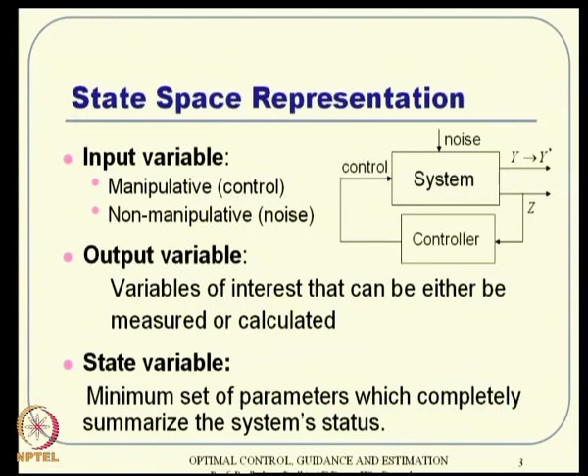So, let us start with state space representation, very basic ideas. When you talk about any dynamical system, we typically talk about 3 types of variables. One is input variable, the other one is output variable, the third one is state variable. I discussed that in the first lecture also, and typically the input variable can be classified into 2 classes. One is manipulative, which is control variable, or it can be non-manipulative, which is noise, and remember both are input to the system anyway.

And then considering output variable, that can be defined as either the variables of interest or some measured variable or calculated variable. So, these two may or may not be same, and this is what the diagram tells. In other words, your performance output can be y, and you want to drive it to some desired value y star, whereas the measurement output can be z, and that may go into the controller, and then control design can take place.

So, it may happen that part of the y variables or all of the y variables can be part of z and vice versa, but they need not be same. All these things can be talked about in a standard state space class. But coming back, the variable of great importance is state variable, and that is defined as the minimum set of parameters which completely summarize the system status. More definitions and implications can be found in a standard textbook on systems theory, and any modern control book will give you more insights with examples.

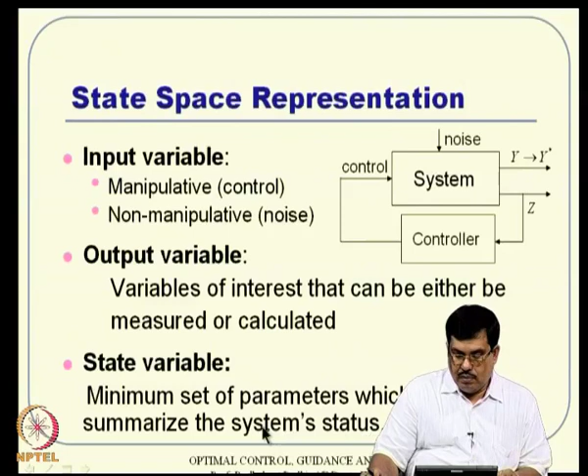But we understand what we mean by state variable, that means a minimum number of variables which can describe the system state. And obviously, remember that you cannot take more than the state variables that are required, or you cannot take less than the state variables that are required either. So, those things are known to us.

Now, continuing further, we have broadly 2 classes of systems that we discuss here: one is nonlinear systems, the other one is linear systems. When you talk about nonlinear systems, we represent the state equations this way: x dot equal to f of x, u. Typically, time variable t is not there, where x dot represents derivative with respect to time.

And remember, the dimension of state is Rn, that means n number of states are there. Control belongs to Rm, that means u is m dimensional, and the output of interest can be p dimensional. And this letter R represents real numbers. So, we typically deal with all real numbers here.

Nonlinear systems, as we know, are typically a little bit difficult to handle, analyze and synthesize. So, most of the time we linearize the system about some operating point, and then end up with representations like x dot equal to Ax plus Bu, y equal to Cx plus Du. But remember, this x in the nonlinear system and this x in the linear system are different meaning-wise.

When you talk about state of nonlinear system, it is actually the true state, whereas most of the linear systems are anyway linearized, so the linearized state and control are typically deviation variables. That means x represents delta x and u represents delta u implicitly here, and delta x can be the deviation of the state from its operating point, and delta u the deviation of control from its operating control. So, those kinds of definitions are available.

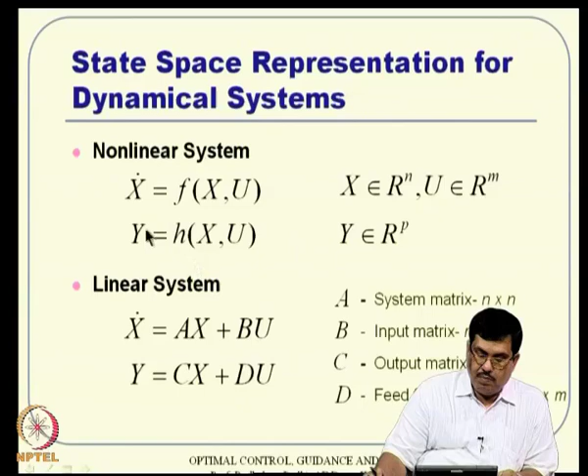So, in this particular course, we will deal both with linear systems as well as nonlinear systems. We are not talking about only one class of things, we will deal with both of them together.

And coming to the state variable selection, typically the number of state variables, that is the order of the system, is equal to the number of independent energy storage elements. Okay, but there are exceptions as well; you can see a couple of examples in some standard textbooks like Norman Nise that will give you that.

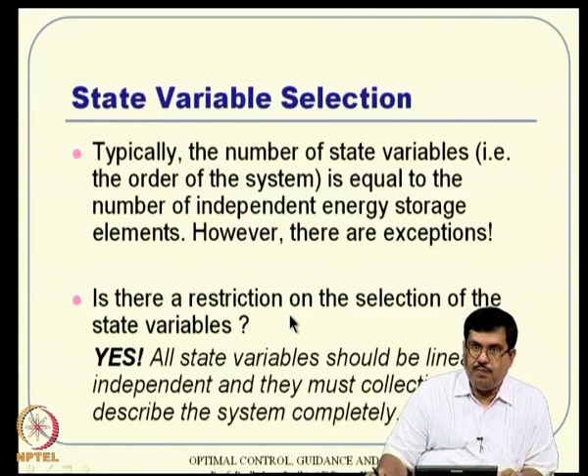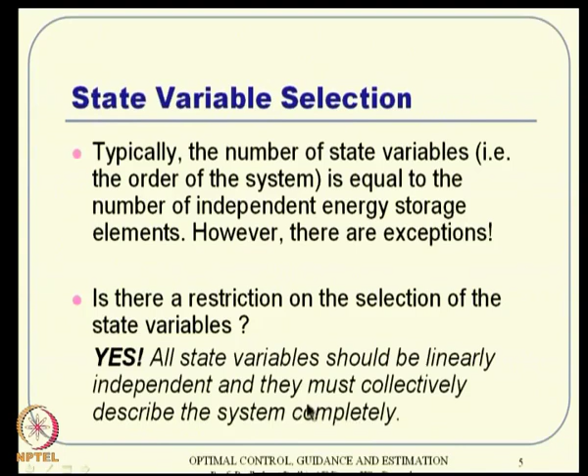But is there any restriction on the selection of the state variables? The answer is yes, and the very primary requirement is all the state variables should be linearly independent, and then all of them must collectively describe the system completely. These are the two things that the state variables should have.

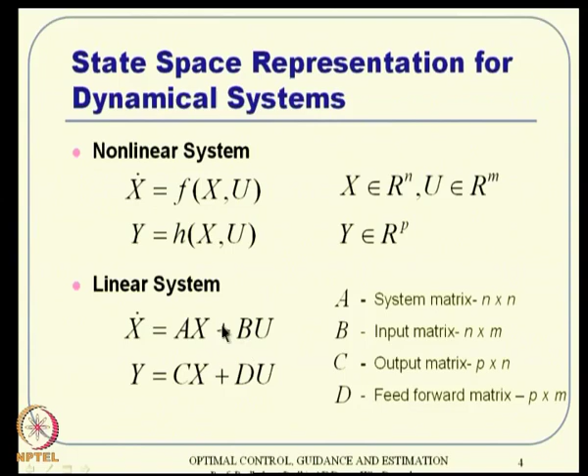And also remember, when you talk about operating point, typically the misnomer is it's an equilibrium point, but that need not be true. An operating point by definition is a point through which the system trajectory passes. That means even if it is passing through a transient trajectory, that can be a potential operating point. That is how sometimes we linearize the system about a trajectory continuously; we keep on getting new linearized systems, which means the A and B matrices will become time varying if you do that.

But if an equilibrium point is your operating point and you linearize the system, then you will end up with A and B being constant matrices, and that is why you get into these so-called linear time invariant systems. But remember, the operating point is a point through which the system trajectory passes; that is the definition. And obviously an equilibrium point is also a point through which the system trajectory passes, because if it is a stable system, ultimately the trajectory will come and sit there. So that is also a possible operating point.

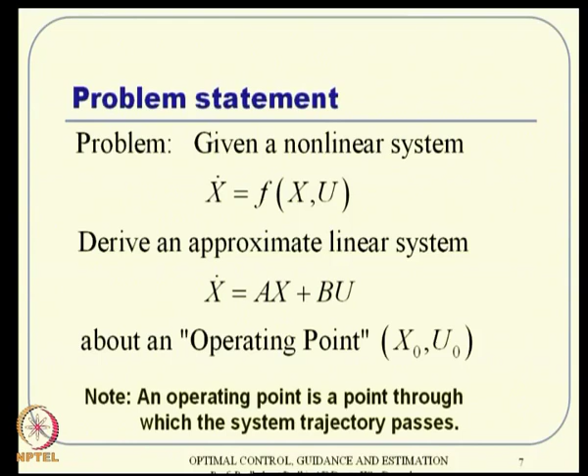The key point to note is even though we use the same state and control notation x and u, when you talk about linear systems, by definition this state is actually a deviation state and this is actually a deviation control. All right. So, proceeding further, how do we get it? That is through the Taylor series expansion.

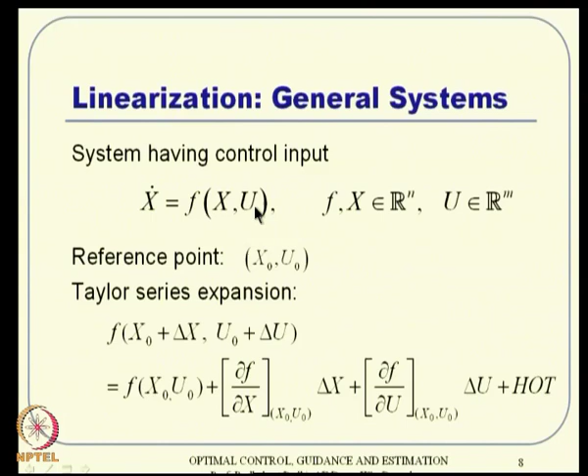So, you have this state equation with the system model available to you. Expand these partial derivatives, put them in a matrix form and evaluate at the point x naught, u naught. That is what you will do for the A and B matrices. A happens to be an n by n square matrix and B will be an n by m non-square matrix in general.

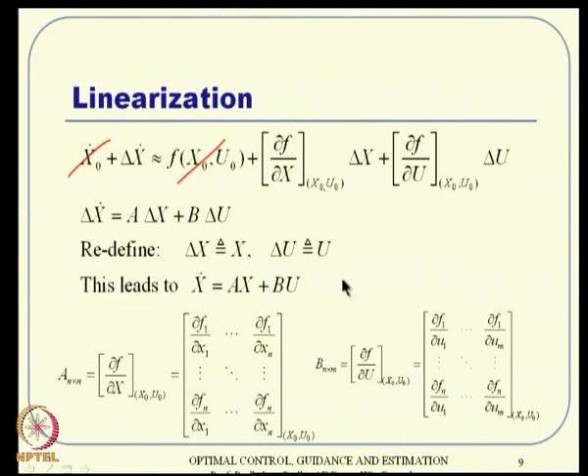Now, if you end up with some system equation like that and try to carry out a lot of algebra, optimal control synthesis and things like that, obviously we have to deal with these matrices A and B. So, we have a lot of requirement for matrix algebra on the way. Even if you deal with nonlinear systems, we have to deal with gradient matrices and gradient vectors. So, we certainly need the concepts from matrix theory.

Let us have a quick overview of matrix theory in general, and from next class onwards we will go to optimization theory, or a little bit of an overview of numerical methods before optimization theory. So, coming to the review of matrix theory, let us start with very simple definitions. We all understand what is meant by matrices, a collection of numbers in an array, so I am not going to that level.

Coming to some standard definitions, a matrix is symmetric when A is equal to A transpose. When the determinant of A becomes 0, assuming A is a square matrix, the matrix is singular. That means the inverse does not exist. Then what is the inverse? If B is the inverse of A, then A B equal to B A is nothing but identity. That is how this forms the definition.

As a standard result, A inverse turns out to be adjoint of A divided by determinant of A. I emphasize, do not get confused between definition and standard result. The definition is A B equal to B A equal to identity, and many theorem proofs and general results will be very easy using it. However, if you really want to compute A inverse, that standard result is typically used, even though it is not a very computationally efficient way of computing A inverse.

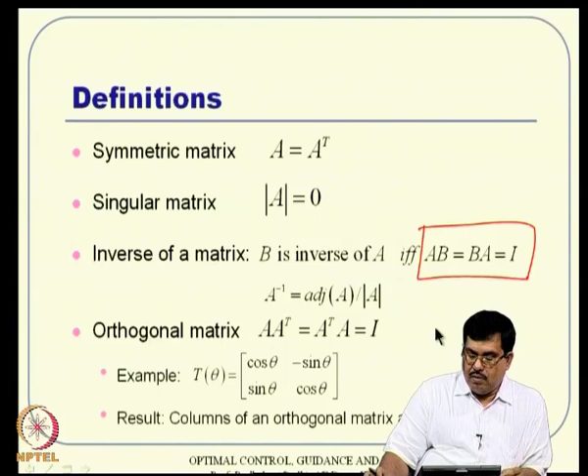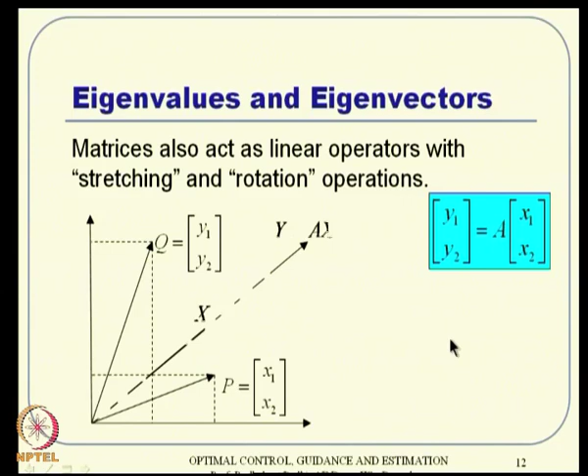One property of an orthogonal matrix is this: if a matrix A is orthogonal, then all its columns are orthonormal vectors to each other, in a vector sense. That means, if you have a matrix given by some columns, then each of the columns you see here will be orthonormal to each other in a vector sense.

So, the typical example is something like this. This is a very standard rotational matrix. That means, if you have a point, then the representation turns out to be like this.

If you have something like this coordinate frame, you have this x versus y coordinate frame and you have a point (x, y) there. The question here is, if the coordinate frame rotates by an angle theta, that means you have x prime, y prime, again at angle theta, then in the new coordinate frame x prime y prime, what are the values of this coordinate x prime, y prime? That is given by this transformation matrix.

That's why it is called a rotation matrix. If you take a coordinate in the original coordinate frame and pre-multiply with this matrix, then whatever number you get happens to be your coordinate in the new coordinate frame. And this result I have already told you: the columns of an orthogonal matrix are orthonormal to each other in a vector sense.

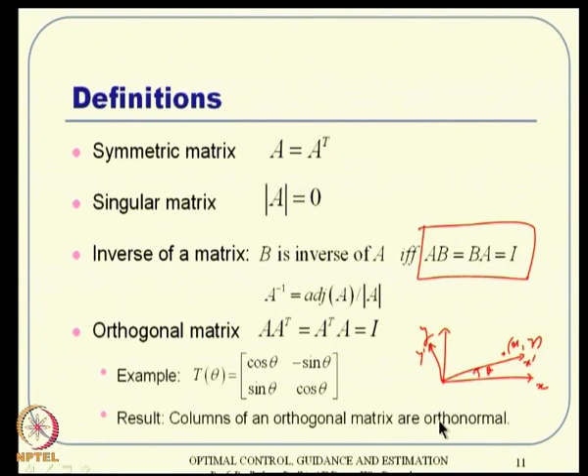Then the next concept is eigenvalues and eigenvectors, and this is how we can think of interpreting it. Now, this is a common mistake that people make. If it is an eigenvector, there is a standard equation for that, and I will solve it. Especially for eigenvalues, determinant of A minus lambda I equal to 0, and then I will get values for lambda, and those are the eigenvalues. That is a standard result, but the concept can be understood like this. Let us start with a simple understanding.

Let us take a point P in a coordinate frame x and y, say x1, x2. The coordinate frame is the horizontal and the vertical coordinate frame in general. So you have a point P, which is x1, x2 originally, and we multiply that by some matrix A. Then we will end up with some numbers y1 and y2, and that y1, y2 can represent a point in the coordinate frame, something like Q.

That means, if I join the origin to this point P and the origin to this point Q, then I am actually getting two vectors. Now, if you look at it closely, by multiplying this vector x1, x2 by a matrix A, I have transformed this point P to Q in general. In a way, I am taking this vector and rotating it as well as stretching it. So there is a stretching and rotation operation involved.

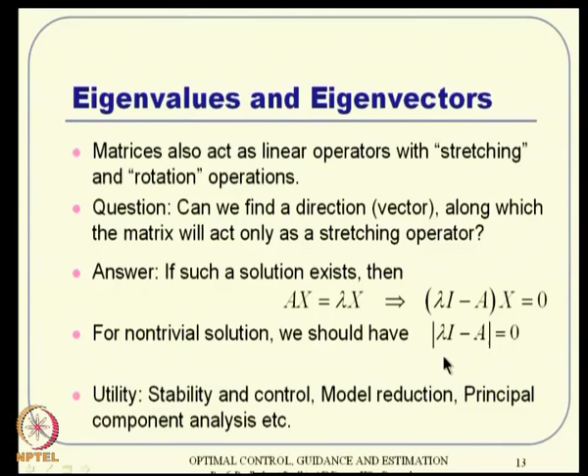Now, coming to some other properties, this happens to be quite a useful one. The theorem says that if a square matrix is symmetric, then its eigenvalues are all real. Remember, eigenvalues can in general be either real or complex conjugate pairs, but all that is necessary for this theorem is that the matrix is symmetric. Then its eigenvalues are guaranteed to be real, and that can be proved. It is a little bit involved, but not that difficult. Moreover, it has n linearly independent eigenvectors. So this is a beautiful property of a symmetric matrix.

So whenever we do not have a symmetric matrix, we will rather try to decompose it into a combination of symmetric and skew symmetric matrices. Those are standard results in linear algebra anyway. But just notice that if you know a matrix is symmetric, you can very quickly conclude that its eigenvalues are real and it has n linearly independent eigenvectors as well. Very beautiful and very powerful property, so I certainly urge you not to forget this.

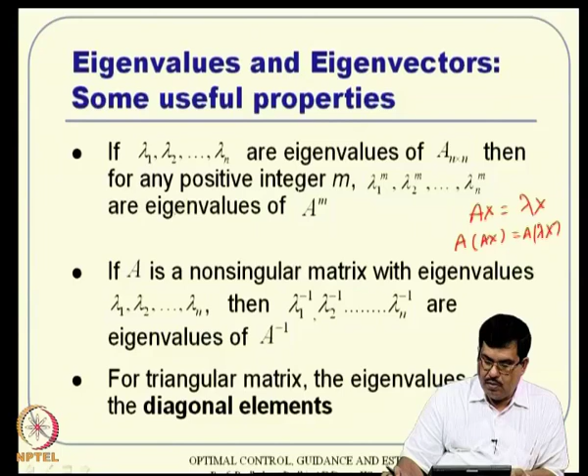So, if this scalar quantity is greater than 0 for all such x, then the matrix is called positive definite. And if you can tell only that it is greater than or equal to 0, then it is positive semi-definite. Similarly, if it is strictly negative, then it is negative definite, and if less than or equal to 0, it is negative semi-definite.

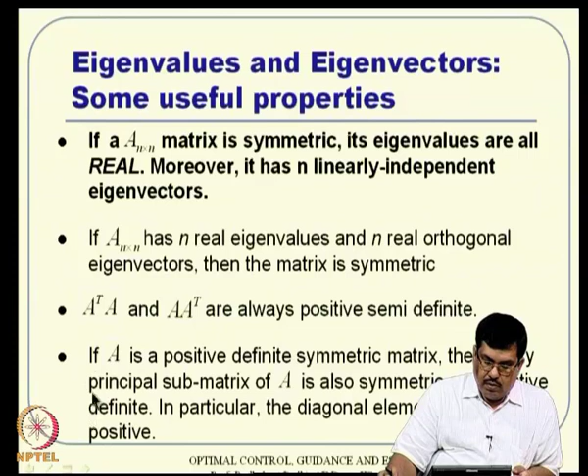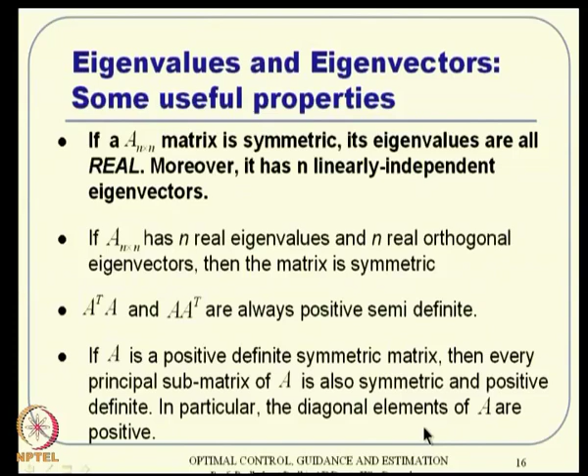And there is another result which tells you that if A is a positive definite matrix, then every principal submatrix of A is also symmetric and positive definite. In particular, the diagonal elements of A are guaranteed to be positive. So, if somebody tells us that A is a positive definite matrix, then the diagonal elements of A are certainly going to be positive. That is a property we use many times. So, I have already told what is defined as positive definite, positive semi-definite, and negative semi-definite matrices.

Then there is another concept called vector norms, which we use heavily in optimal control theory as well. A vector norm is a real valued function, meaning the output is always a real number, which satisfies the following properties. If I know a vector x, the norm of x can never be negative. It is 0 only if x is the trivial vector, that is, only if x is 0 0 0 0, the origin point; otherwise it is always positive. Essentially, the norm is the concept of distance from the origin.

So, distance from the origin is 0 only when you are at the origin itself. Anywhere else the distance is certainly going to be positive. It also satisfies the second property: alpha times x. If alpha is a scalar, if you take the norm, it will satisfy modulus of alpha times norm of x. That means it does not matter the sign of alpha really. So, whether alpha is positive or negative, it is guaranteed to stretch it that way.

Then there is also a triangle inequality result, which tells you that if I take vector x and vector y and I sum it up and then take the norm, that is going to satisfy less than or equal to norm x plus norm y. So, that is the concept of vector norms, meaning of having a distance.

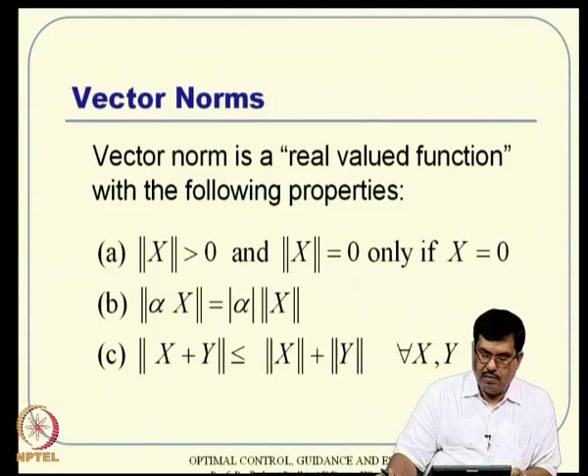And some standard results: there are various norms which can be defined for computation purposes, and the first thing that comes to your mind is one norm. That means you simply take the components, take the absolute values and sum it up. That is nothing but one norm. Two norm is something very standard, we all know that. We just take squares of everything and then take half, and obviously here you can argue that modulus is not necessary, true, but to have a systematic way of definition, we take modulus everywhere just for math's sake.

Then if you have norm 3, you can do the similar algebra, take third powers everywhere and then take 1/3, and similarly the pth norm in a standard notation sense can be defined that way. An infinity norm turns out to be like this, going by this definition, and it is an interesting result that even though infinity to the power and 1 by infinity are there, it has a meaning, and it turns out to be the maximum value of modulus of xi. That means if you simply take the modulus and do not add it up, just see which is the maximum value, that value is nothing but infinity norm.

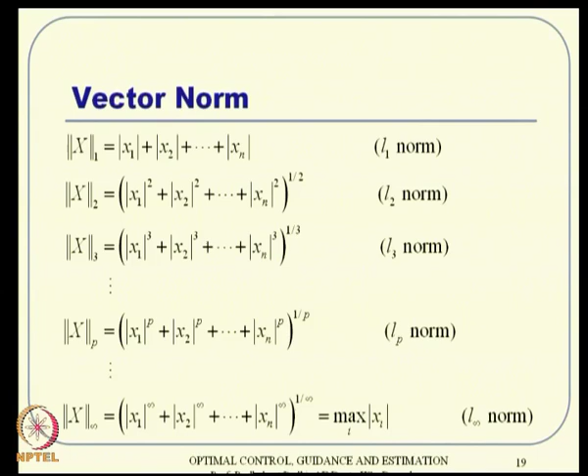And very interestingly, in finite dimensional vector space, meaning the dimension is not infinity, in other words X has some n components only, not infinitely many components, all norms are equivalent. That means if you prove something using some norm, whatever norm that is, a similar property will hold even if you talk about any other norm. So, this is the standard property in finite dimensional vector space, which is not true in infinite dimensional space.

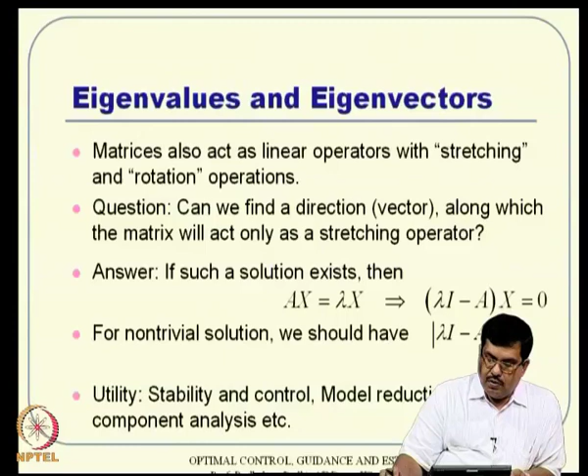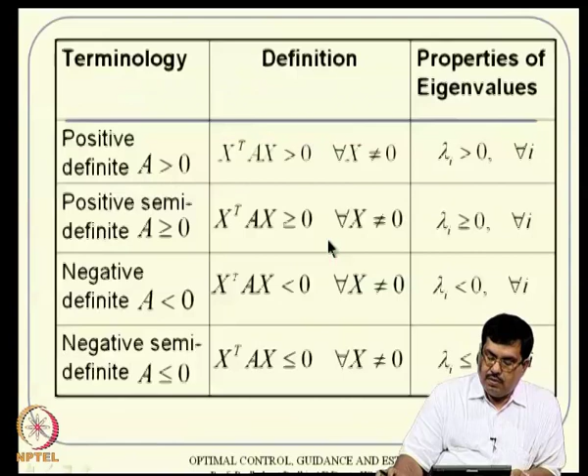So in that context, if I multiply any vector X with matrix A, then I am getting a vector Y which has a different magnitude and things like that. Now, the question is, how much does it get stretched because of A, not because originally the vector itself was longer or shorter. We are not interested in that.

If I multiply a vector by matrix A, then I get some vector, and the question is, how much am I stretching the vector because I multiply it with matrix A. That's the question, and it can be argued that I can evaluate it this way: I evaluate the norm of Y and divide it by the norm of X. So, that is how it is evaluated. Remember, both numerator and denominator are vectors, and vector norms are already defined here.

So, you have to pick up any norm, first norm, second norm, third norm and all that, and then you can talk about carrying out this algebra, and it turns out it actually defines some sort of amplifying factor or amplifying property of this matrix. So, that is how the matrix norm is defined. It is also called operator norm, induced norm, various terminologies.

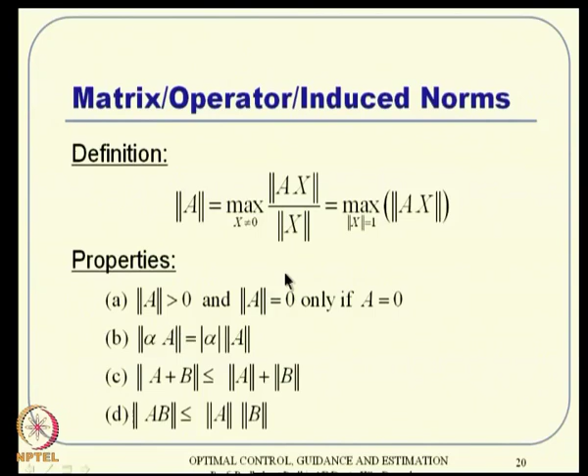We will see that. And remember, with this matrix norm and all, the matrix need not be square. It can be a rectangular matrix as well, actually. And singular values are also defined for rectangular matrices. Eigenvalues are not, by the way. So, singular values can be defined like that.

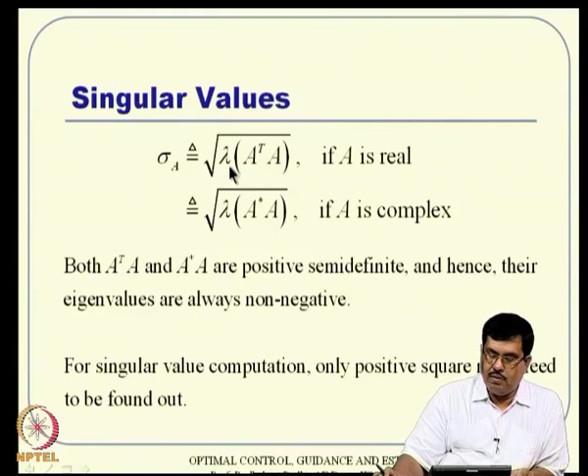Anyway, so this is the idea. You carry out this algebra, the eigenvalues of this matrix are guaranteed to be greater than or equal to 0, take the square root and you end up with the singular values. Alright, then there are concepts for least squares solution. The question is: there is a linear system of equations Ax equal to b, and we are asking for the solution for x.

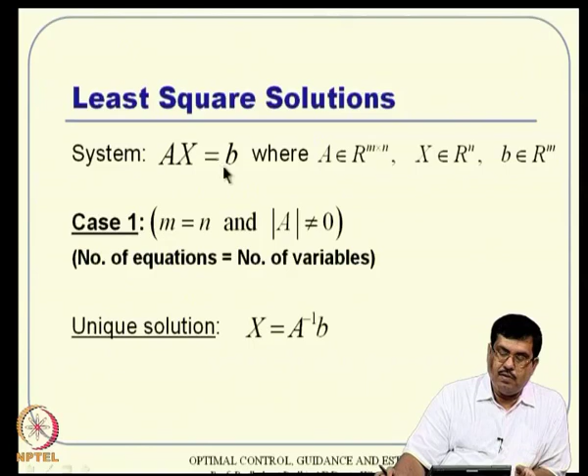Now, from our previous knowledge, it is very standard that if m equals n, it is a square system. A is a square matrix and you have an equal number of variables and equations. Then there is a unique solution x equal to A inverse b. It's a very standard result. But the question is, what if A is a non-square matrix? If it is non-square, then either m can be less than n or m can be greater than n.

Here m is less than n, that means the number of equations is less than the number of variables, an under-constrained problem. Obviously we can have a solution which satisfies the equations exactly, and in addition we can do something else, because we have more freedom and fewer constraints. In fact it has infinite solutions which satisfy the equations exactly. Out of those, what kind of solution is of interest to us?

One answer is the minimum norm solution. Suppose x is a control variable; then we want a solution for which we apply minimum control. We are not compromising on solution quality, the equations are satisfied exactly, but we want to satisfy them with minimum control value as well. That is how we can think of the utility of it.

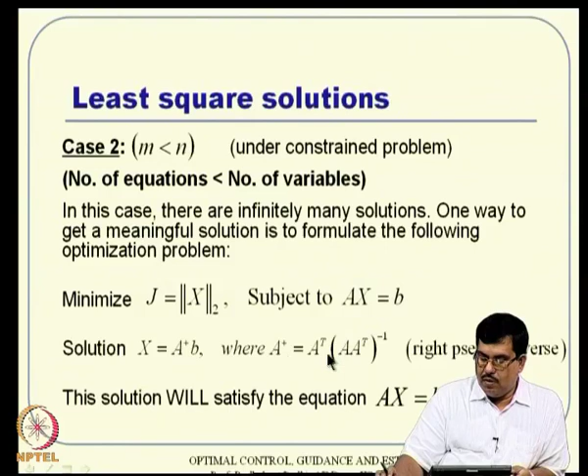That is how it is formulated, and the solution turns out to be the pseudo inverse, x equal to A pseudo inverse b, and the pseudo inverse is defined like this. A pseudo inverse can be a right pseudo inverse or a left pseudo inverse, and in this example it turns out to be the right pseudo inverse. Remember, this solution satisfies the equation exactly as well. So, under-constrained problems are typically a luxury in a way.

Then what if there is an over-constrained problem, exactly the reverse case, where the number of equations is more than the number of variables? Assuming all these constraints are linearly independent, meaning they are meaningful and not combinations of other constraints, it turns out we cannot do a perfect job; we can never aim to satisfy the equations exactly.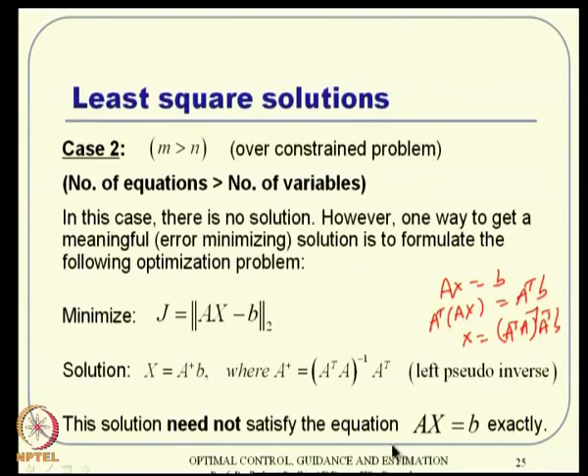But you will not be able to do this exercise that way that easily in the other case. It requires a little bit further algebra. The point to note here is this solution will not satisfy the equation exactly. It will satisfy only approximately. So in general this is the left pseudo inverse, this is the right pseudo inverse, and some of the properties that pseudo inverse satisfies are like this. You can see it will feel as if it is an inverse.

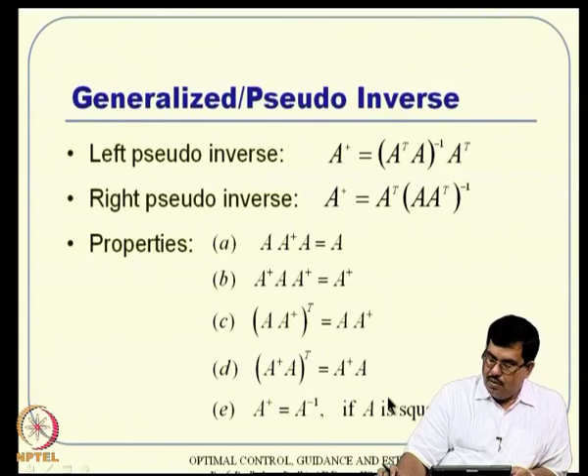If I talk about A pseudo inverse A, and close the bracket here, it feels like identity, so it is A. Similarly, if I close the other bracket and interpret the pseudo inverse as inverse, I will end up with the other one. So it feels very close to the inverse property. That is why it is called pseudo inverse. Also, in a compatibility sense, if A is a square matrix and determinant of A is not equal to 0, then pseudo inverse is nothing but the inverse, and it is easy to see that here as well. So we end up with a matrix inverse.

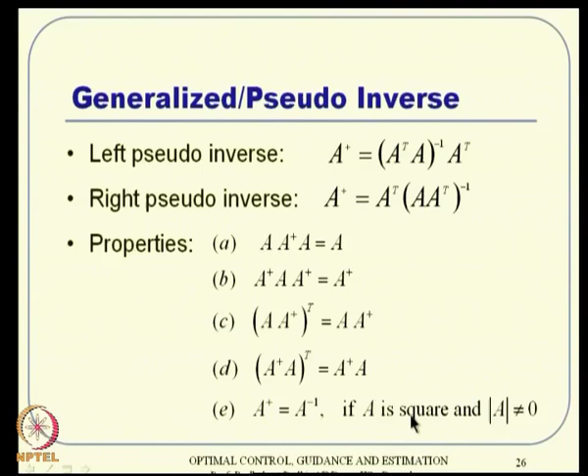Now, before we conclude this lecture, it is time to see some vector matrix calculus. So far we have talked about vectors and matrices containing numbers, but what if they are functions of some other variable? That is where our interest lies, because most of our state variables and control variables are time varying. So for a time varying matrix you can talk about differentiation and integration. By definition, component by component differentiation is the differentiation of vector x, and component by component integration is the integration of vector x.

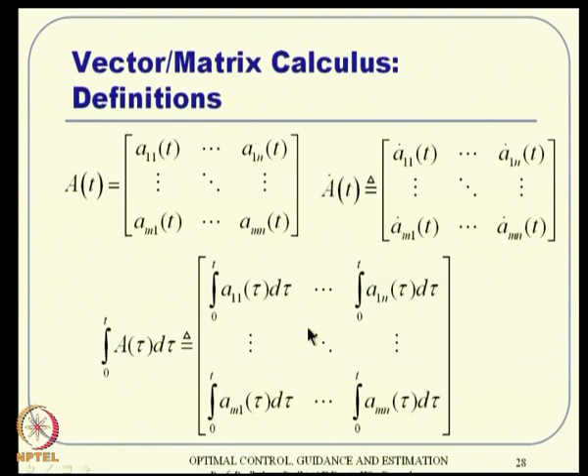But there is interesting algebra after that. This is also true for a matrix. If all elements of A are time varying, then by definition d/dt of A is component by component differentiation. Similarly, integration is component by component. But there are certain standard results. The differentiation of A plus B, where A and B are functions of time, is nothing but A dot plus B dot. It is very easy to see that.

All you have to do is go back to the definition. A is like that, so A dot is like that. Similarly, B is B11, B12 and so on, so B dot will be like that. On one side you add A(t) plus B(t) and then differentiate using the standard definition. On the other side you add A dot and B dot. You will easily see that this is true, and it feels trivial in a way. So d/dt of A(t) plus B(t): expand the matrix, apply the definition of differentiation, combine it back, and you will see it is nothing but A dot plus B dot.

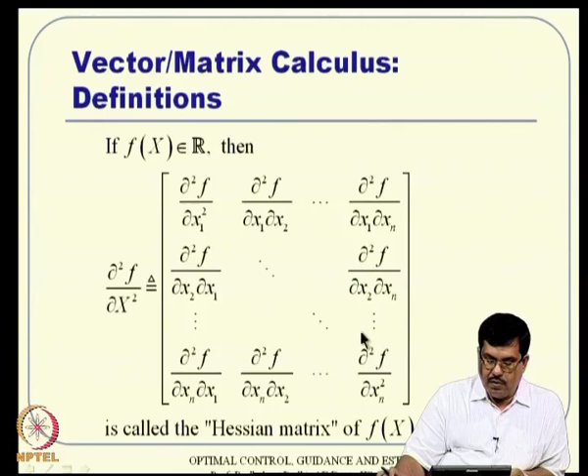Then how about the second derivative? If f of x is a scalar quantity, then the second derivative is defined like this, and remember this is guaranteed to be a symmetric matrix. It's called the Hessian matrix, because del square f by del x1 del x2 is nothing but this quantity. So, no matter what order you take, both are same. Using that property, this matrix is a symmetric matrix all the time.

Then there are certain derivative rules. If b is a constant vector and x is a variable, then del by del x of b transpose x, or del by del x of x transpose b, turns out to be b. You can think of it as scalar algebra, but in vector matrix calculus also this property is true. It is very easy to show simply by carrying out the long-hand algebra. Take b equal to b1, b2, b3 up to bn, x1, x2 up to xn, formulate this, take the derivative using the definition, and you will end up with b1, b2, b3 arranged in a column. So, it is nothing but the b vector.

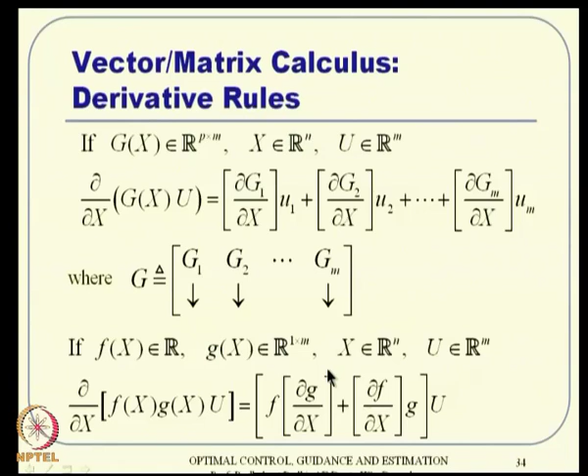So, what about chain rules then? If you have a function of a function, then what? x is a vector, f is a function, and then I take another function of that. x can be a vector in general, but small f and big F can take different forms. First, if small f is a scalar and big F is also a scalar, then this is the result.

If small f is a vector but big F is a scalar, then that is the result. And if both are vectors, then that is the result. It is similar looking, but you have to worry about which comes first and whether there is a transpose or not. Again, these are very standard results, and if you want to use them, you can use them in your research proposal also.

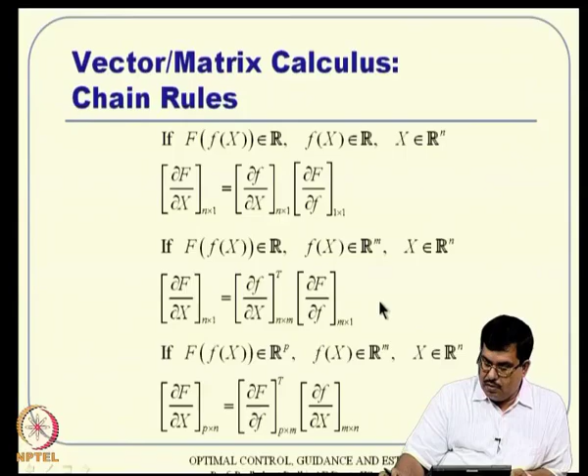So, that is how I can summarize this lecture: we have got some overview of what a nonlinear system is, and then we carried out what is called linearization of nonlinear systems. Then we talked about various matrix properties, and many of these things we will use subsequently in our further discussions of topics related to optimal control.